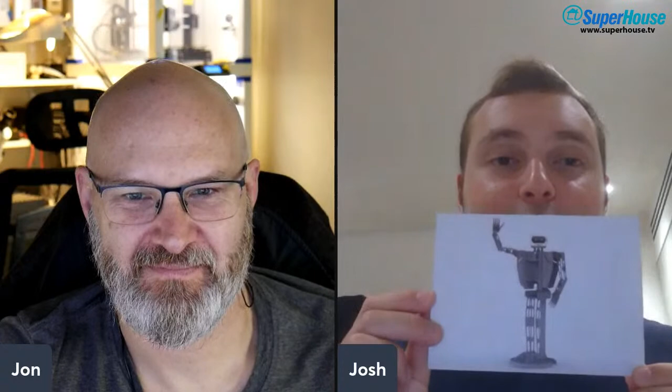So everybody had, I've got it here, this was the postcard with the robot on it. So that's a render with some information on the back. And this side is our design school's logo for the year, and all of that. I'm not good with this mirrored thing. All of the information there. So it was a bit like an art exhibition, and you're going to see that.

Now, to give a bit more context and background on the robotics, I've got 2 former robots here with me to show first. I'm only going to go through them quickly. So this is not your first project. This is not your first robot. It's okay. I've got a USB camera on a tripod here. It's not the highest quality, so I apologise in advance. And I'm not going to spend too long on these 2. But we'll start with the first one I did.

This one ran from September 2019 till March 2020, a month I'm sure we all remember very well. And it was completed just before Boris grounded everyone in the UK. And as soon as it was finished, I decided I want to make the second one. But we're going to start with the first one.

Now, it takes me a second just to switch the camera over. All right. Can everybody see that? I'm also going to try to figure out how to make you the larger one. Hang on. How do I minimize myself?

There we go. Okay. So you can probably see in the background as well, there is my reflow oven. Might look familiar to you, Jon. It does indeed. Yeah, the 962C. I won't tell you how I decided to choose that one. But anyway. So this is the first robot I did.

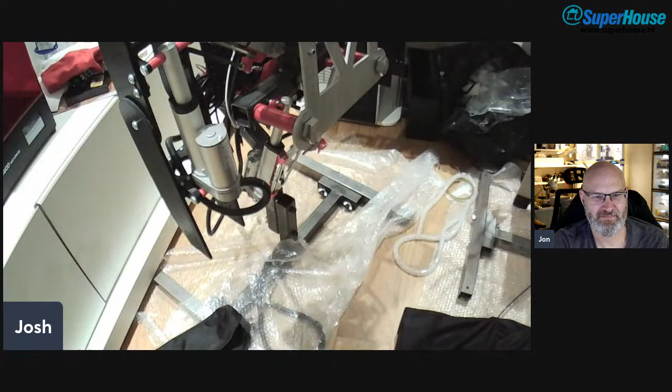It stands 4 feet tall. Let's see if we can tilt the camera down a bit. It's on sort of an H-frame mild steel base that's been welded. The majority of the joints are done with these stupidly overpowered linear actuators. I think each one's got 60 kilograms of force. I do remember somebody telling me once, I bet I could stop one of those from opening. I said, all right, you put your hand on either side and we'll try. Obviously, the actuator won.

Now, the head was actually the first thing I designed, funny enough, in bed on the computer one night. I just laid it out. And it was based on this, which is a clock I designed. So it's got 2 boards in there. We'll save going over that for a minute when I go back over to the table. But it's got an RGB matrix for its display. And you'll notice a resemblance.

Yes, I do. It's got the exact same matrix for the eyes. And that's NeoPixels, WS2812s or 13s.

Oh, Josh is muted. I'm not sure why. Josh, I don't know if you can hear me, but you are currently muted. Is that back? That's back, yes. So I picked up my microphone, and as I did that, I unplugged it.

Yeah. So you're talking about NeoPixels. Yeah, so it's an array of NeoPixels. I think it's 11 by 5 NeoPixels, which was designed originally to make a 7-segment type display. But that also makes very good eyes. But because you'd get bleed with the light between them, I 3D printed effectively a square grid, which sits on top, which is what, if I can just move my camera over to there, all these different parts are actually the build up of that. Yeah, so it's a sandwich of all those different layers together.

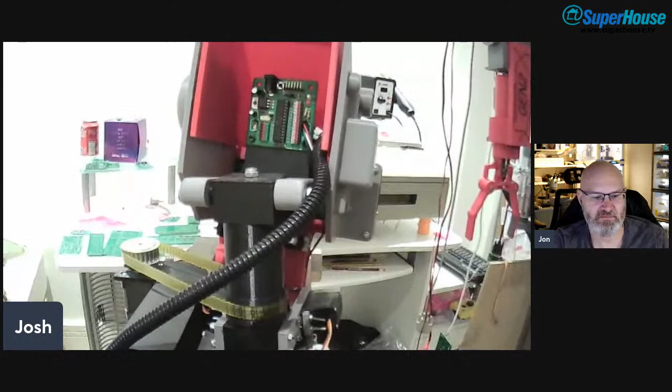Yes, exactly. And then in the back there is a DenScript Uno DIY. So those who saw the last stream will remember the DenScripts, which are my layout of boards. Now that is a DIY one, which is effectively meant to be a kit. It's basically an Arduino Uno, but it's got no surface mount components. In all honesty, I designed that because I was at university and didn't have access to a reflow oven and wanted to put it together. So that's how that was born.

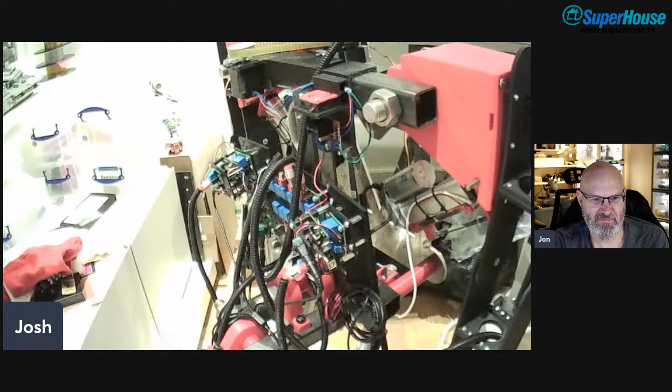And then getting around the back is going to be a bit tricky here, so you're going to have to bear with me a minute. I apologize if anyone gets motion sick. The video has frozen at the moment. That's back. Yep. Actually, I can just flip it around. I've got it on some bubble wrap on the floor so it doesn't scratch it. But the back is an absolute mess of cables. This is very impressive. That's a lot of work you put into this. Thank you.

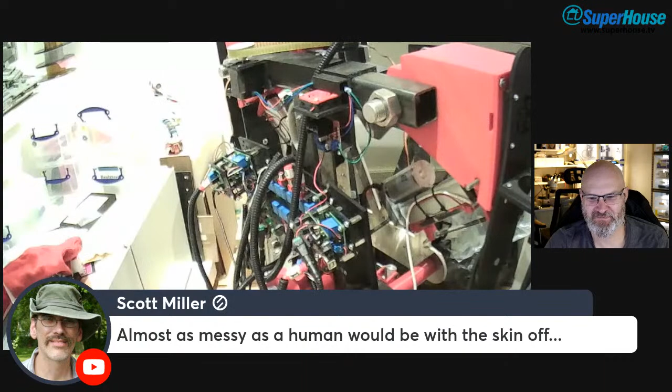I'll say right up now, I'm not a coder. I think there's a saying I heard once, which is I can copy and paste well enough to make it work. And that is quite literally how I was with this. So just as an example, these actuators which allow the arms to lift up and down, they've got attached to them linear slide pots, and that was how I got my position feedback. Right. So you've turned it into a closed loop system. That's really cool. So effectively it was a servo is what I built here. Yeah. Now, at the time, my programming was even worse than it is now, and I wouldn't count it that great now, to be honest with you. You're not far off, Scott.

Now, because I couldn't work out 100% how to get parallel tasking working on the Arduino, what I decided to do was instead I made these two stacks, if you want to call them that. That's effectively an Arduino Uno with a board which I call the dual relay motor driver, which is a long way of saying two relays wired together to allow you to turn a motor in two directions. So it's like an H-bridge set up out of relays. Effectively, yes. I could have gone and just bought an H-bridge. Don't ask me why I didn't. And I decided to make that board instead.

Now, the bigger board in the middle is actually... I'm not going to try and turn it around any further, but you can just see it here. This is 16 relays hooked up in pairs, so you get 8 outputs, all controlled by an MCP23017. Okay. So it's effectively an I2C relay driver, but with relays in pairs, so you can turn motors in each direction. That does the actuators that let the elbows go up and down, and also does the actuators that are in the waist there. And I'm just going to turn it back around. I promise the camera work gets better.

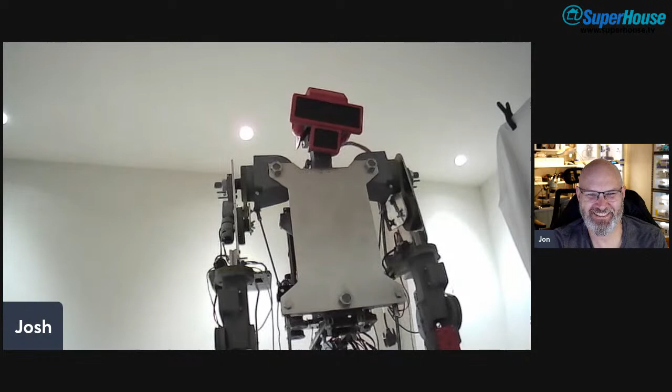So yeah, what I'm going to do is switch over now. This one did play true to the idea of the giant robot, because this is what we were just looking at. Yeah. And this is Gen 2. Okay. It has grown a little. So there's a height comparison. Just going to bring the camera up. So what does this robot do that's different? Firstly, I switched to actually using motors as opposed to actuators.

The head, underneath the hood, if you like, is exactly the same. So it's still got the LED grid, the exact same one, except I opted for using black PCBs this time, to make it a little bit harder to see. Thanks, Mitchell. It's also controlled over DMX. Oh, right, the lighting control system. Exactly. It's a lighting control protocol.

So the chest is actually hollow. There's a neopixel strip in there, and it provides illumination, so it almost looks like a heartbeat. Oh, can you see through that? I can't really tell. Is that a piece of aluminium? Yeah, so you've got 2 aluminium plates here and a gap with an LED strip here. I hope you can see what I'm doing.

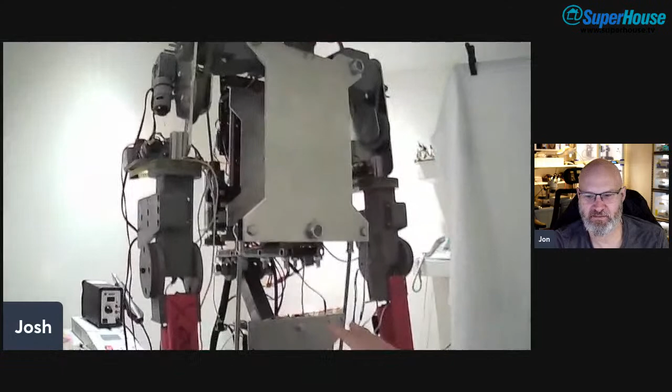So you've got ball screws here, which allow the arms to lift up. These ball screws here, effectively you've got the universal joints in the middle, and by lifting one and lowering the other, it makes the robot tilt in one direction or the other. If they both go up, it leans back. If they both go down, it leans forward. It's a little bit more back heavy than I would have liked, I'm not going to lie to you. So when it leans back, I get a bit worried it's going to fall over. The balance is a little off.

Yes, exactly. Most of the electronics are on the back, and to be honest with you, it's been gutted recently, and that's because I'm upgrading it with the control system in the next gen, which we're going to see in a moment. Okay. What else to say? The power is all on that MDF board at the back. Well, actually, before I go on to that, I also.

Yes, that's correct. So the software I'm using, I think by default it allows you to use 4 universes. I don't know if you can add more. I'll be honest, I've never had to go beyond 1, but it does give you that flexibility.

I also made some other possible heads to go with it. So this is one. At first glance, I thought it was something like a floodlight, but no, it's all RGB LEDs. Bigger mouth, and then. It's also very Bender-like. Yeah, 100%.

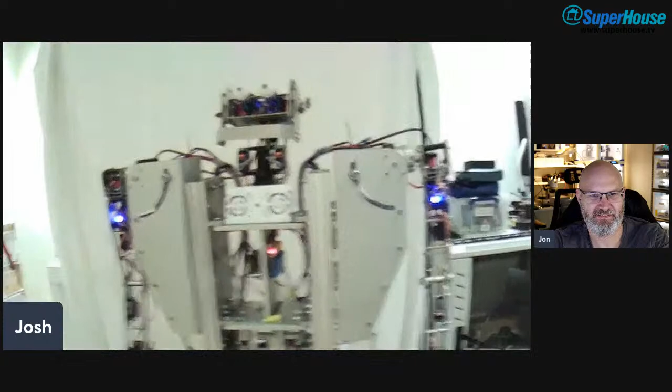Yeah. Okay. Should we do the big reveal? Yeah. It's very interesting to see your use of DMX. All right. So you want me to just bring this up on the stream? Yeah, let's click on add to stream. I'm going to show it first, and then we'll switch to the thing I've got. Okay. In that case, I will bring you up as the main screen. I am already. Yes. There he is. The camera's gone a bit wonky. I do apologise. It is one of those cheap USB cameras. That's all right. If I lower one leg, I might be able to get it. There we go.

So you'll notice the 3D printed eyeballs. And I've actually got some spare eyeballs, so we can look at them on the table and see how they're made. But the 3D printing was lacking a lot more in this one, and we really went to town with the aluminium. I'm going to move around a bit so you can see it, and there's some stuff on the screen we'll look at in a moment. Working from the bottom up, the base, and you'll see there's a support pole running up the back, they're mild steel that have been powder coated black.

The base is wide enough to support it, and to be honest, when designing for a deadline, you play it safe, and I didn't really know where the center of gravity was going to be, so I put the support pole in, and I'm really happy I did. That just acts as a third leg effectively. The legs and the feet are all made of aluminium that's been slotted together. These are all flat sheets that have been slotted.

Let's bring the camera down a bit so you can see. Actually, I've just discovered the quick release feature on this tripod. Right, so I'll try and be as steady as possible. But you can see that's a good view.

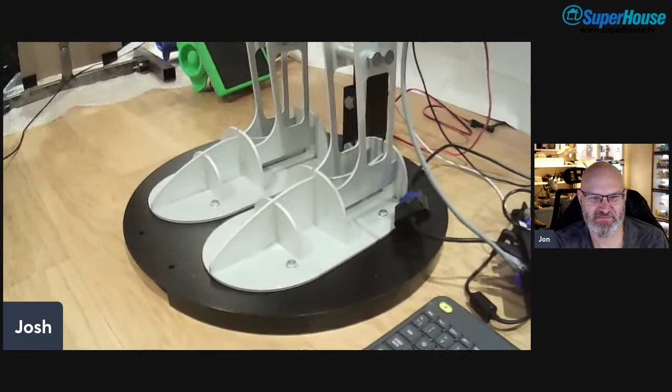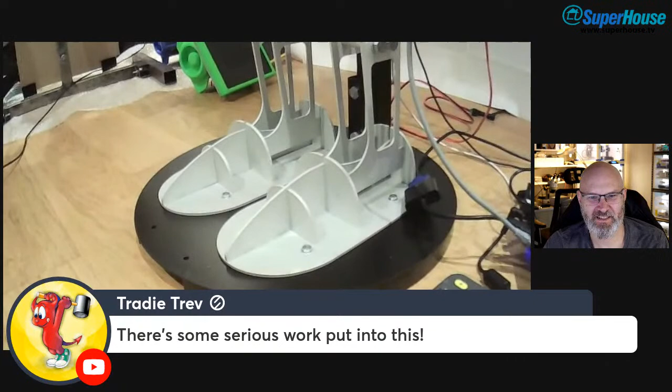A lot of the aluminium has been anodized. When I first slotted it all together, it was not anodized at the time, it looked so nice. I decided to weld it from the underneath. Yes, you wouldn't want the welds to show. I wanted to have seam lines and stuff like that. And I'm really happy with how that came out. I even went to the effort of turning the ends of the bolts so that you didn't see any details on them. Oh, wow. And there are many bolts to do that to as well. Yeah, these are M10, and I think there were something like 40 of them.

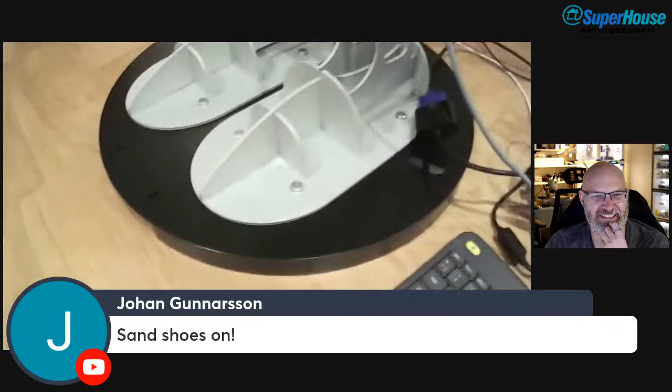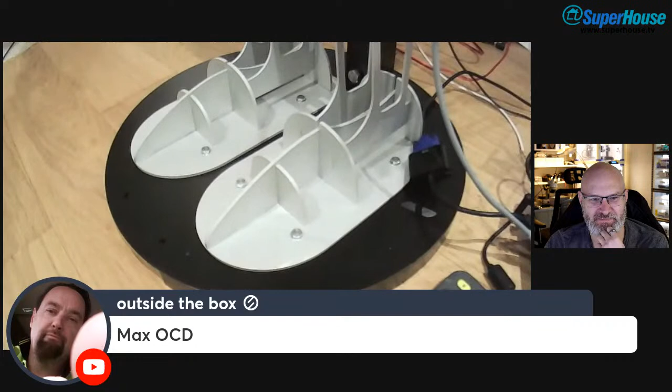About the feet, what I actually did one day, I put a ruler on the floor and measured my foot, and I got the length about right. The width I got way off. But a lot of this was based on my own proportions because that was all I had to work on. It is shorter than me, but the arms are about the length of my arms, and the hands are about the size of my hands.

You can say that again, Scott.

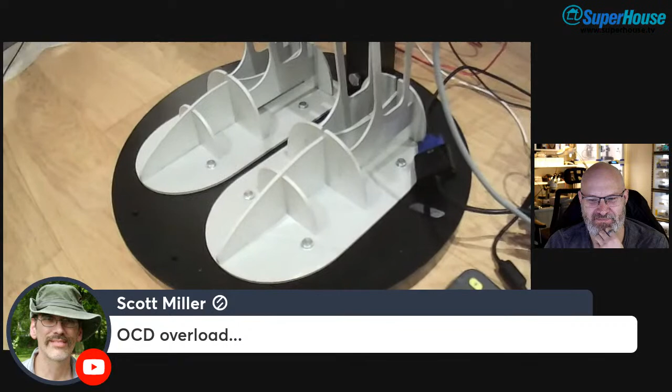If we sort of work our way up, the waist section. Now you'll notice there's some discoloring in there. What that was actually caused from was something I wasn't aware of. If you try and anodize with two different grades of aluminium, which is what I was doing, you get discoloring. So what I really should have done is when these sections were water jet, is then water jet a thin bit off the same sheet and use that to weld, so it'd be the same aluminium that came from the same sheet. Because I didn't, I got this discoloring.

I might try and see if I can just color it some way to hide it, but again, it's a prototype. I kind of know for next time. It doesn't look bad. No, to be fair, when I first saw it out the packet, I would admit I said some four-letter words, and I was a bit worried about how that was going to affect it. But actually, now that I've had it like this for a few weeks, I'm quite happy with it. I'm not sort of complaining.

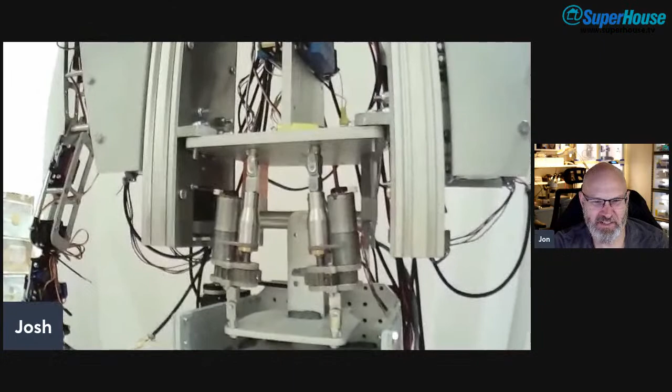Yeah. The chest, there's sort of a universal joint I made down there in the middle at the back, and then you've got these two actuators on the front. And I've got some pictures we'll show afterwards of the actual testing of those actuators. That's really interesting. So that makes it like a tripod structure where two legs of the tripod can change length, and therefore you can move the top around. So you'll see at the back there's sort of a shiny pole, if you like. Again, I'll show pictures of that, but that's a turned and milled piece that allows it to bend.

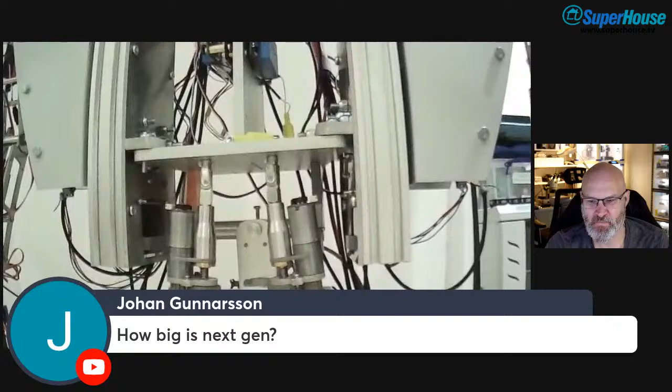So Johan, next gen is 140 centimeters tall, give or take a bit. So yeah, work our way up. The main circuits are based in the chest, but I've taken some of them out, partially because the coding isn't finished, and also so I can actually show them to you, because at the moment I've only got the number that I need. I don't have spares. So if I had spares, it'd be great to have them in and show you, but you'll see. There's a few bits you'll notice that are still the orange prototype color that need replacing.

Making our way up. I call this bit the collarbone. You've got 2 speakers and a camera. Oh, right. Okay. So it's a camera in the chest area. Yeah, so I'm trying to keep as steady as possible. I might now look at this height, switch back to the tripod because that'll be steadier than my hand.

So Scott asked, does his waist flex enough for it to sit in your car? Which just conjured up a vision for me, if you're going through a drive-through or something with a robot sitting beside you. Yeah. But there have been a few times I've considered just sitting it in the seat without the legs. Annoyingly, the shoulders are so wide, if I try and stand in front, you might get a sense of how wide the shoulders are. Yes, it is very big. Yeah, it's a bit too wide to sit in the passenger seat of my car, annoyingly.

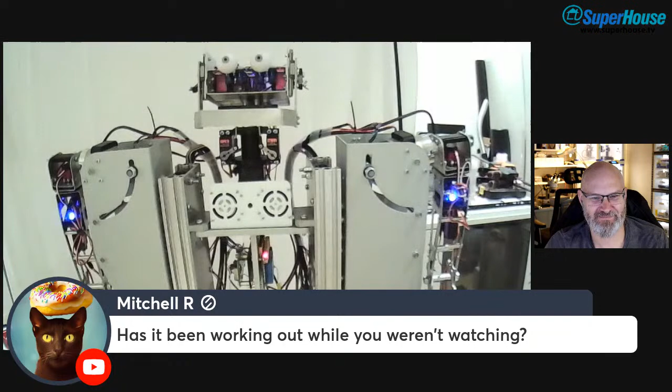Yeah, I've got that comment a lot, or something like that. Then in the head, there's 10 servos. So there's 2 that move the jaw. There are 2 for each eye, and they're not installed at the moment, but it's actually also got eyelids, and there are 2 for each eye set of eyelid, 1 for each eyelid, top and bottom.

So it works out. In total, there's 40 motors in the whole unit. That's a lot of servos just for the head. Yeah, so the head and neck, there's 13 servos in total.

Making our way just to look at the arms and the shoulders quickly. So beforehand, I mentioned that other shoulder prototype we showed a picture of. That was actually made of 3 pieces of aluminium that were sort of slotted together like so, and then welded. Now, one of them actually, rather than being slotted, it had bolt holes and was bolted in. And the reason for that was, once it was assembled, there was actually no way to get to the stuff inside. And I always thought there'll be that time when you have to do maintenance.

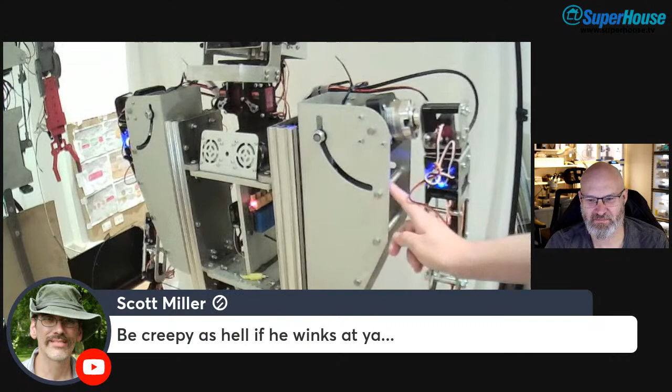In the end, I realised that you could actually design it in such a way that you wouldn't need to remove the side. But I was still worried about the rigidity of it. Those fears were unfounded, thankfully. This is just a sheet of 2mm aluminium that has been bent twice into sort of a U shape, with turned and tapped aluminium rods down the sides, so that makes the square. And then again, more turned bolt heads holding that all in. Yeah, it's surprising how little material it takes to make a very strong, rigid structure once it's folded and cross-braced.

If you think about something like an aluminium can, for those of you who have done it, an aluminium can feels reasonably strong. You can crush it with your hand, obviously, but it's really surprising if you cut it open and discover how thin the aluminium is. It's like a sheet of paper. And once you cut the can open and it doesn't have that cylindrical structure, it suddenly becomes really very weak and floppy. So once you take material and bend it into a shape like this, it becomes much more rigid.

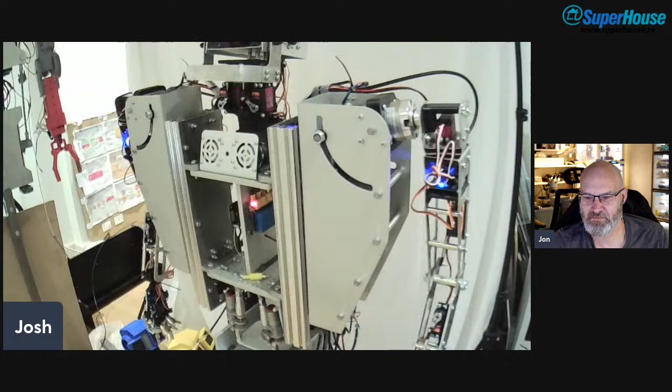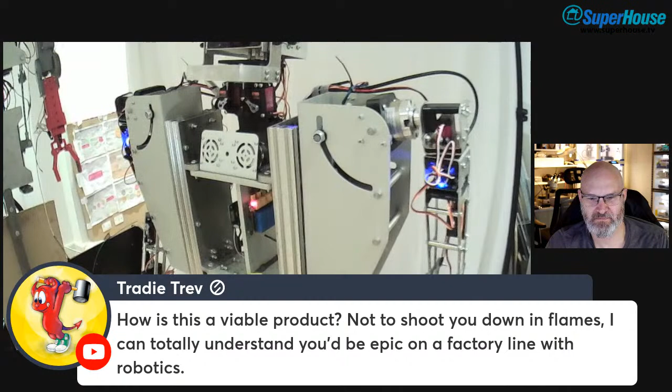One thing that I always think about, I'm sure you have seen them, Jon, you sometimes get support bars in 19-inch racks, which are more for putting zip ties on if you want to do a bit of cable management, and they're literally just a bar with a load of holes that goes across the length of the rack. But if you just did that, it'd be really flimsy. What they often do is they'll bend the sides, so they might only bend back maybe 5mm, but that bend stops it from just bending in half when you hold it.

So it is amazing that when you put a bend into something, you think about girders, like in buildings, how much stronger they are. Yes, 2 materials at right angles, and it becomes very rigid. Yeah. Now, on this shoulder, and I should just mention, each side is just a mirror image. So if I show you one, I've basically shown you the other as well.

The previous image I showed you, we had these big linear rails that the shoulder ran up. Now there's a few different types of linear rails you can choose from. The ones I chose are pretty strong, so that if you imagine it was held like this, it wouldn't just pull out, and I was worried about weight in this direction. In the end, they were way over the top, so I've used this stuff, which goes by a lot of different names. A lot of people call it Rexroth, because I think they were the first company that ever produced it. A lot of people nowadays call it 2020 aluminium extrusion, because this is 2 units wide, but a single unit is 20 by 20 millimeters.

This is 2040. It's V-slotted, so you can put V-nuts in and make structures. A lot of 3D printers are made out of it now, but you can also use V-wheels, which are runner wheels. So if you think about 3D printing heads, they move left to right, they'll use V-wheels to run in. Inside here, there's 2 V-wheels on each side, so you've got 8 in total across both shoulders. There's a ball screw that runs up the middle, and in the bottom, there is a stepper motor with a limit switch, and that's what does the motion up and down.

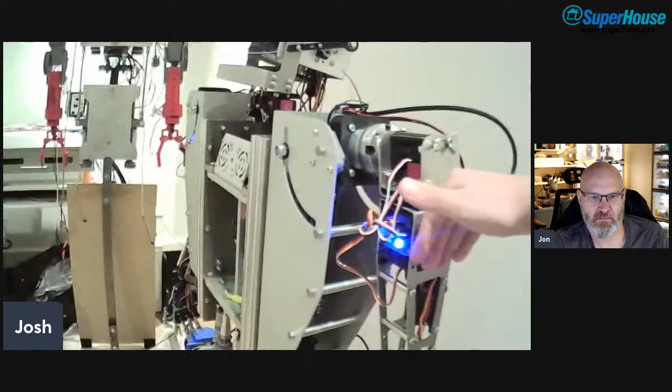To move the shoulder in and out, in fact, I'm going to go freestyle here again. If I can get it out. Come on, there we go. So on the inside here, we have another ball screw. As that moves up and down, it pushes at this point, which runs through the whole middle, and that lifts this motor up, which allows the arm to swing up this way. If that makes sense. Okay. Yeah. And then put this back in here.

There we go. For the arm, we've got a servo here, which gives us that motion. We've got a servo around the back, pushing on the back of the elbow. So as the servo pushes down, the elbow goes up. Mm-hmm. Similar motion for the wrist.

And then the other part of the wrist there. Oh. And the hands. The hands are incredibly intricate. That in itself would be a major project for someone.

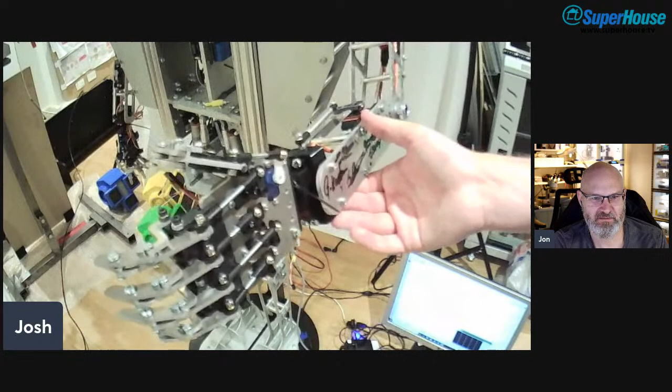Yeah, well, the funny thing about this was that each part of this project was a project in itself. So there were 5 hand prototypes, there were 3 arm prototypes, 4 shoulders, I think 8 heads. You know, only 1 body was made, but it was the 7th design. There was so much that went into all of this. And that was the funny thing. People said, you know, you're a nutter that you're doing this, Josh, but I went on and did it.

What we'll do is, if I stop showing that and I show myself again. Amy likes the hands. Yeah, well, the hands have been more trouble than I thought they were going to be. I'm not going to lie to you, because of friction between the aluminium. So I've been through 3 different types of servos so far to get them working. And I think I'm going to have to end up redesigning the fingers, making them a bit longer, so I can space out the bolts that go in all the joints and put washers in between.

Each finger has 6 aluminium parts, and obviously that's not including the bolts that hold it together. So on one hand, just for the fingers, you've got 30 parts, not including bolts. In total, in terms of water jet parts, there were 110 in next gen, and prior to that was 120 parts that had to be designed, unfolded in CAD, and made flat, and then those had to be folded, welded, folded again, tapped, whatever else. So there's a lot of work into it.

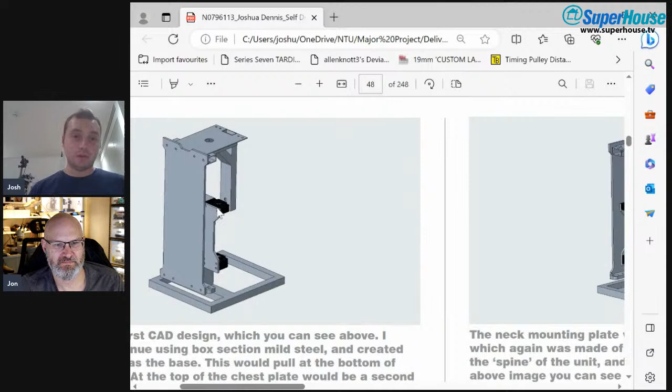Thank you very much. So this was the original thoughts I had for the body. So this body, which sets it apart from the last two I've done, it can rotate at the hips like that. And that was something I was really keen to get in. So my initial designs, which you can sort of see here, were using ball screws between those points, pulling down with rods to this front bit of the body. So the front body was effectively suspended from a hinge that would be somewhere here at the back. And then this whole thing would be a plate that would rotate.

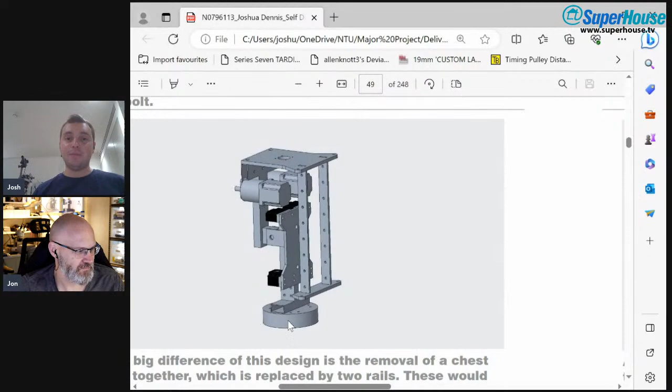And then I came up with, instead of trying to do it like that, using these captive balls. A lot of people probably have seen them before. It's glitching out a bit here. They're balls that are sort of captured within a housing, and they're used a lot on the bottom of those mobile computer consoles that you see sometimes in industrial settings, so they've got the computer tower they can move around. And I had the idea of having that sit in a slot. So you'd have a body like this with those in a slot, and it could then rotate. In the end, that idea was completely abandoned for the one you've just seen.

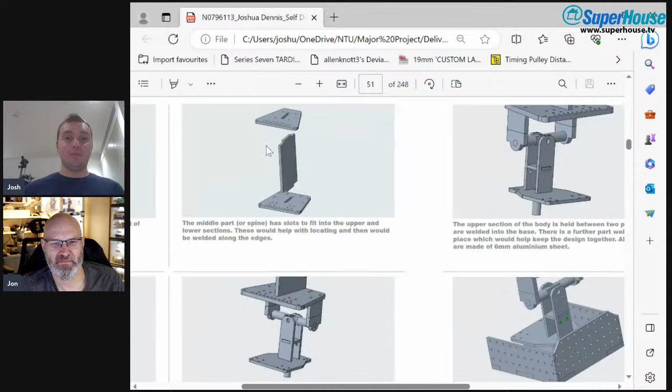It's taken a while to render. This document is over a gigabyte, I think. Wow, it takes a while to render. But the body you've just seen is effectively this. It's 3 water jet cut sheets, which are then welded together in place.

That is then attached via this central axle to another part, which is made of 4 water jet cut components, which are then welded into place. That's got a rod which sits inside the housing of the waist. Now, all those holes, just looking at, I worked at an assembly table, a couple hundred of those coming at the top. That's interesting, Scott. So basically, the whole table would be like a movable surface.

That's quite cool, that. The reason I've got all of these holes you'll see there, and it looks a bit like a sieve, is because at the time I hadn't designed the legs, but I was already sending this off to be cut, and then I was going to be assembling it. So I had to think ahead, and I thought, right, I don't know what legs I'm going to do, but I know that this is the size of the waist. I'm going to cover it in holes, and each one of those holes is tapped to M6.

Which was a lot of. I really got a strong arm doing that, tapping all those holes. Yeah. And then until I decided that using a drill was a better idea. Don't do that. You're not meant to do it, but I did it. But that meant that I wasn't also limited in my leg design. I also allowed points in case those actuators weren't strong enough. I could put springs in to give them an assist.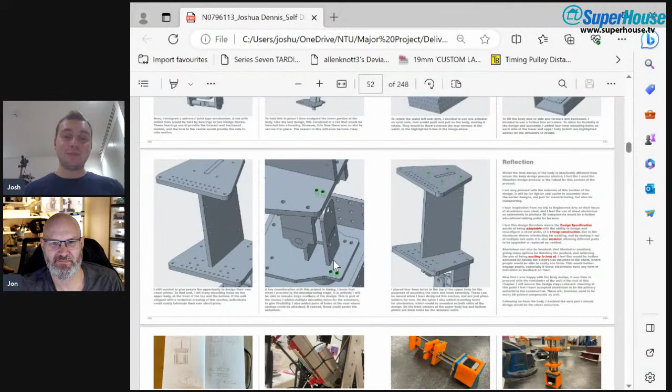And again, it was working on the whole, I've got to get this right first time, because I won't be able to remake this. I'm not on a massive budget, and I need to submit this at some point. Then I can see that you're talking about the size of the document. It looks like you're on page 52 of 248. So you've essentially written a book. Bear in mind that these pages are spreads, so 2 pages as well. Yeah. You can see down here in the middle, that's the seam of the book.

So yeah, it is a lot, and you can see a lot of it is imagery, thankfully, but there's a lot of text that goes along with it, and each image is probably 20 minutes of work. Obviously, you might say, "Oh, an image like that's not a lot of work." You're right, but an image like that, the extra minutes taken up in that one, if you get what I mean. Yes.

My initial idea for those actuators was actually looking at using stepper motors, and I found this really weird stepper motor where its axle is a lead screw. So you wouldn't need to have. Yeah, I've seen those. And I came up with some wacky design that was far too big. But in the end, I went to a similar design to what you've just seen. And this is what I was looking at. This was a 3D printed version before I made it out of metal, and I found these really cool ball joints, which were really cool until I discovered they couldn't take a lot of weight, and then I got rid of those, which I was really sad about because I really liked them.

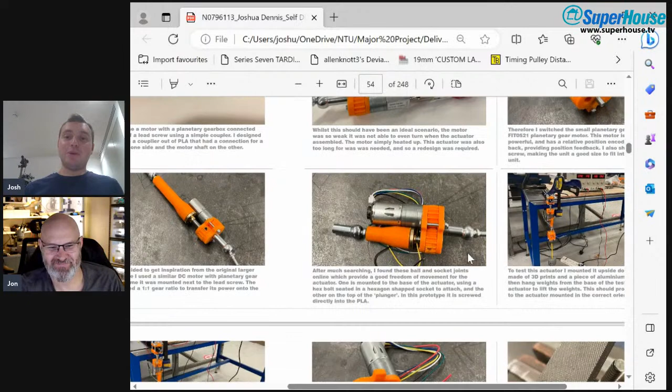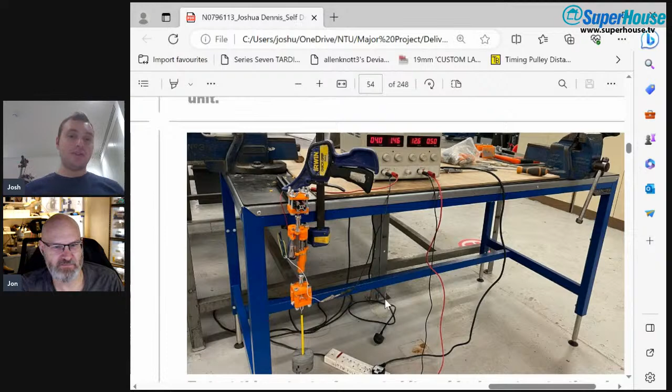The motors, you see, the motors are only about that big. So I was getting a lot of force out of them with a gear reduction that it already had in its own gearbox. And then I think it was about a 2-to-1 reduction I had with these stainless steel gears that were fabricated as well. So I was quite happy with that.

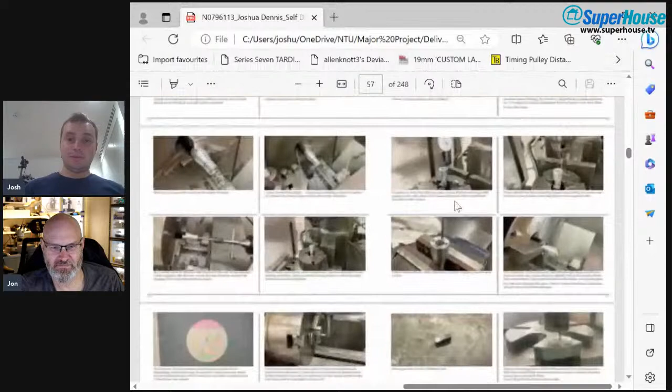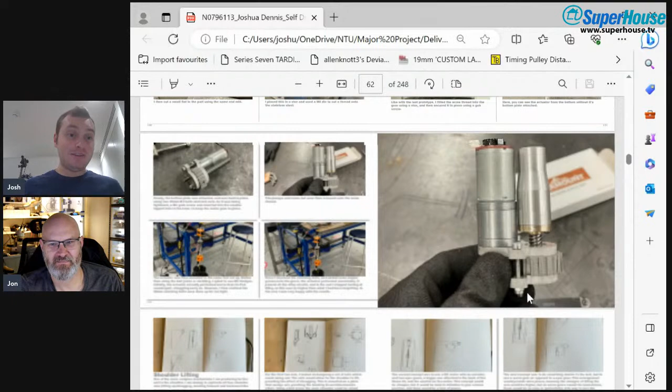And then again, it was all the turning of the actual plunger part. Again, I'm sorry that they're pixelated, but it's taken a while for the images to render. And that was the final one that ended up being used, without obviously the 2 joining points added onto it. So that on its own was about 2 weeks just on those chest actuators, which, bear in mind, are only that big, and the whole thing's 40 centimeters tall.

The shoulders we already spoke about briefly. These were the laser cut tests that were first. This is the one you saw a picture of earlier, just in a different angle. So I'm using that extrusion I mentioned before to make a

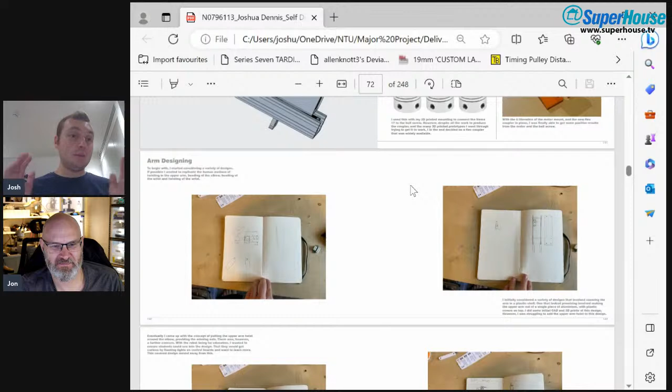So we've spoken a bit about the shoulders already, so I'm not going to cover that again. Make my way down. It's actually funny. It's not funny. Don't do this if you haven't done a degree yet and you're planning to. But I did do an all-nighter on the last night, as a lot of people do. And a lot of things I had to do was fill in gaps of images. And if you look at these pictures that were added, you see it getting darker and then getting lighter again as the night goes on and it comes into morning. That is true representation of the all-nighter.

And you can also just see here, this is a sheet of 6mm aluminium on the water jet cutter, where it's got some bits cut out. And the reason I've got that picture is you might notice some of those shapes look a bit similar. That sheet cut parts for all 3 robots over its life. So that is the chest plate of the first, that is the chest plate of the second, and that's parts of the waist of Next Gen. So it sort of covered its whole life.

So David just asked, is this document available? I'm afraid it's not. So this was the document that was actually submitted as part of my degree. I'm not actually sure if I'm allowed to submit it publicly. Not because anything on there is top secret, but because of the sections I'm not showing. Interviews were conducted with people from industry and education, and while they consented to it being used in this document, they didn't consent to being published into the big wide world. What I might do is see if I can publish an edited one where I would either remove those pages or for fun just black them out and make it look all CIA type.

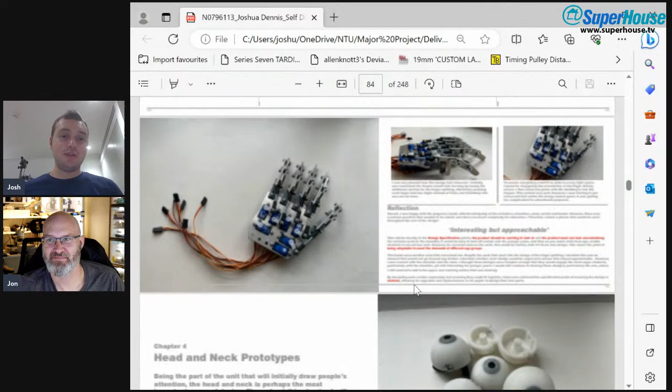We were talking about the hands before. I did actually look at trying to see if I could do a finger splitting on the hands, and I managed to do it, but it just overcomplicated the design. But that was the first assembled hand prototype there. Yeah, I think that is such a project all on its own.

What I will do now is, because this is also an electronics YouTube channel, should we actually talk about some electronics? Yes, please. Let's do that. So what I'll do is I'm just going to move my camera background. Do you want to just stop sharing that view, Jon, please? Sure. I've got a table set up here at the side.

There we go. So I should just mention now what Next Gen actually runs on. It runs on a Jetson Xavier NX, which is, for those who don't know, effectively a Raspberry Pi on steroids. It's got massive amounts of GPU, and it's great for machine learning and machine vision. When you've got the Jetson, you can import something called Jetson Inference, which is their framework. And the program it's running, which I'm going to be demoing in a moment, is skeletal tracking. In the old days, you'd have to put markers on you, and you'd have cameras that would track that. This does that without any markers, and you can use any web camera to do that. Nice.

But that just runs all the brain, and then everything else is connected to a central controller from that. And you're going to see that now. Settings, camera. Right, let's just adjust where we are.

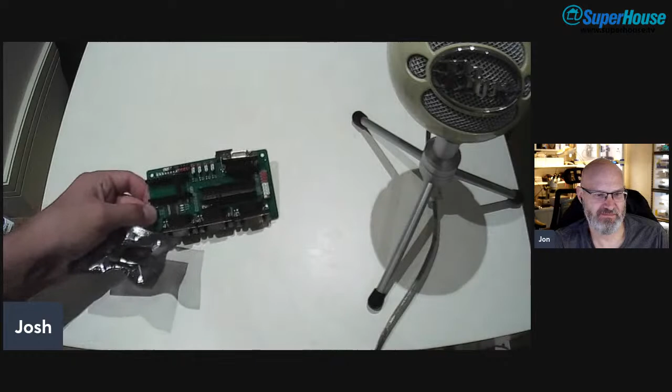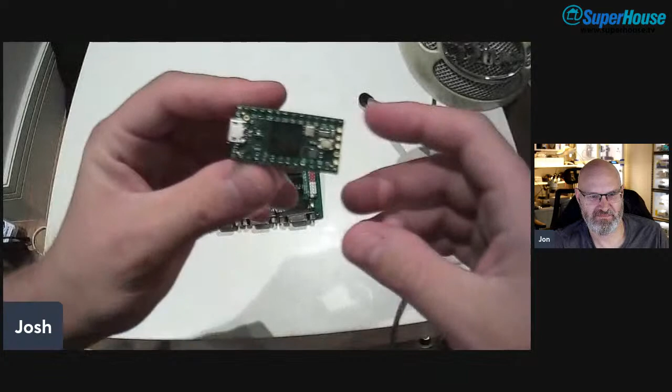So the controller that's inside of Next Gen is one of these boards here. And then it also has sitting in it one of these as the main hub, if you like. So this is a Teensy 4.0. It's a 32-bit Arduino compatible controller. It's basically every developer's dream because every digital pin has interrupts. Most of them also have PWM.

It's got CAN bus built into it. It's got 8 UART serial interfaces. So it's a great board. That would sit in this point here. And then I decided in the end to control everything over I2C.

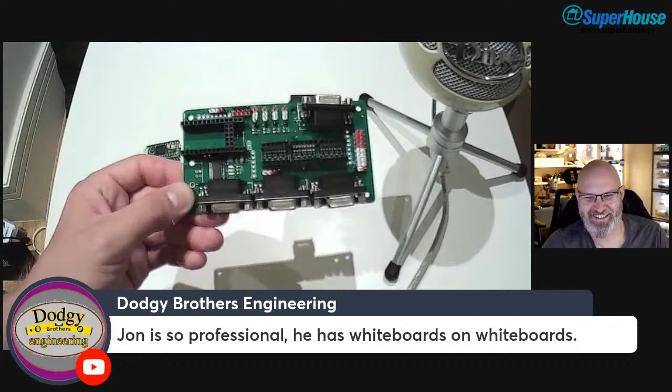So, I know that was... This is a random comment just thrown in. I think that's a reference to a video I did a long time ago where I was using a whiteboard to explain something, and I drew a whiteboard on the whiteboard. Yeah.

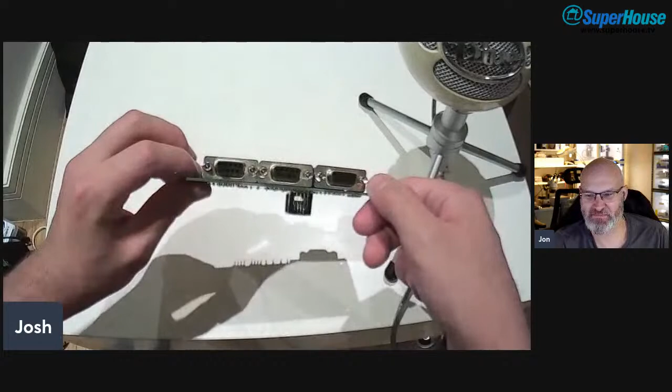So I decided to control everything over I2C. And what I did was I thought to make it easy, I'll use these 9-pin D-sub connectors to connect everything together. Each one is actually exactly the same. It's just doing I2C, but obviously the I2C address is set at the end device, not on this board.

And it meant that during setup, I could plug anything into any socket, except I ended up putting these 3 too close together, and I put something in the middle I can't put in the other 2. So it only accepts 3, not 4, but I fixed that on the upgrade. Now, the Teensy is a 3.3 volt device, but I kept everything else at 5 volts. So I then put in level shifters.

I put in the footprints for the actual level shifters, but in the end, because it's cheaper than the components, I bought the level shifter modules that are just easily available, and I just stacked them in there. It's got 6 pairs of level shifters because you've got 2 for I2C. You've then got 4 serial ports here. And then also you'll notice an FTDI connector here with, I know it's not populated, but USB socket.

That was for that. All the data that this is sending back to the Jetson, it would also send out of this USB port, and I could plug in with my laptop and get that information without having to connect a screen and a keyboard to the Jetson. Nice. So it effectively gave you a second debugging channel without interrupting the connection to the Jetson. Completely, yes. And also, once I've set up, sometimes you put the screen and keyboard away because it's not needed, and that can start being a distraction for people if you've got to then get out in the middle and plug it in, and exactly.

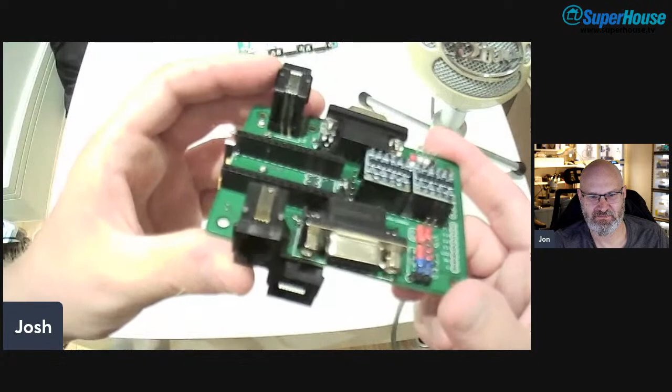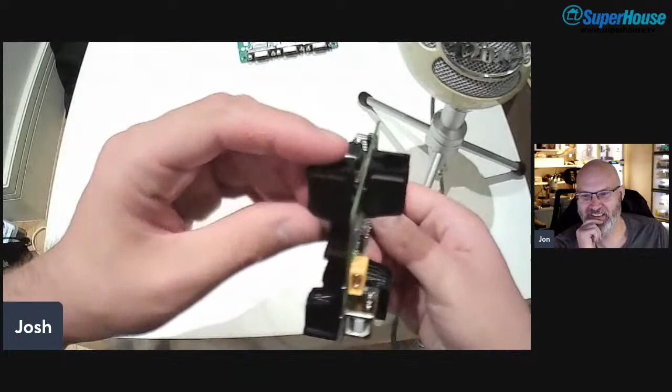However, those who've ever used RJ sockets before will know that you've got 2 rows of holes for the pins to go through, and they're offset by the distance of half a hole. I might have got the offset the wrong way around on the 2 rows. So I've never done that. Never. You can't claim that I've ever done that. Yeah, well, I have. So I had to cut off the supporting pins, break the pins out the back, and it works. A revision has been done.

This one's got 2 I2C sockets, another serial port here, 3.3 volt I2C, 5 volt I2C, all the power connectors and stuff to interrupt it. And then on the back, look at it this way around, a power in for 5 volts. And I'm going to explain why I know that's 5 volts in a minute. Oh, and you've used an XT series connector. Yeah. You get the double thumbs up seal of approval from me. It's an XT30. I'll let you guess where I got the footprint.

The USB debug, and then you'll notice there's 2 RJ45 sockets. One of them breaks out with my light switch footprint on the ones I sent Jon. So it goes ground, plus 5 volts or 12 volts, in this case it's 5 volts, and then 4 switches. Reason is, I thought it'd be great if you needed to set the robot off to do things based on triggers. You could just plug in, and if you just grounded a cable, it might react to something. So it was an easy way of building an interface.

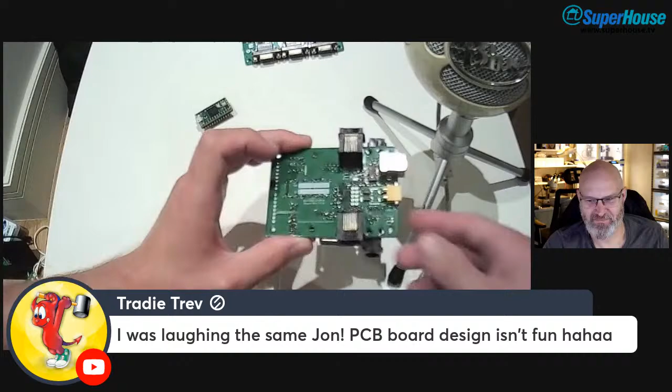The other one goes off to an indicator board, which just happens to have 8 connectors. So I thought I'll just use RJ45 because it's easy to swap in and out when there's a mistake. Also, on almost all of the boards, I put these 2 white boxes with serial number and ID. I'm hoping to manufacture next gens, and for keeping track of circuits that might break, give each one a serial number, and that way you can keep track of it.

Well, that little comment has just opened up an enormous rabbit hole. There was a comment maybe half an hour ago, which I didn't bring up, which is, how is this a commercial project, a viable product? And there was a little bit of chat about how this is a university project. It is showcasing skills. It doesn't necessarily have to be a product. But now this sounds like you do want to be making it. Did you want to talk about that now, or later? I'm going to talk about that at the end of the stream, if that's all right. That sounds good. And that means everyone's got to stick around to the end to hear it now.

I will also just show you, I have made a longer version. I haven't actually finished placing all the parts on this. This one's got extra I2C sockets. It's got the USB debug. And rather than having all the serial ports broken out, I left them all together so I could put another board on top if I wanted to.

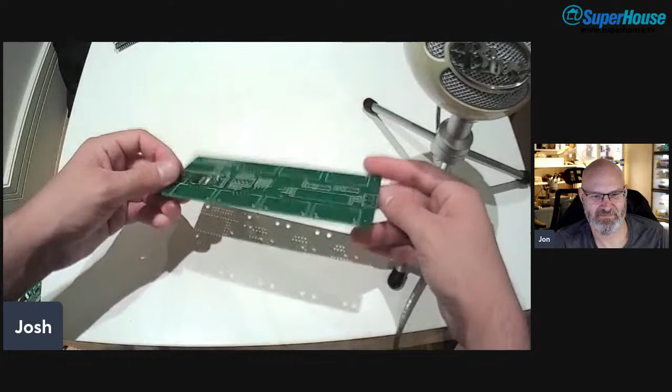And it's also got space here for the DMX module, rather than having that on a separate board that plugs in. So it's kind of an all-in-one contained board. Originally, I was going to put this on the back of Next Gen as an upgrade, but decided not to now. But I do want to start selling these circuits so that other people who are making robots can use them.

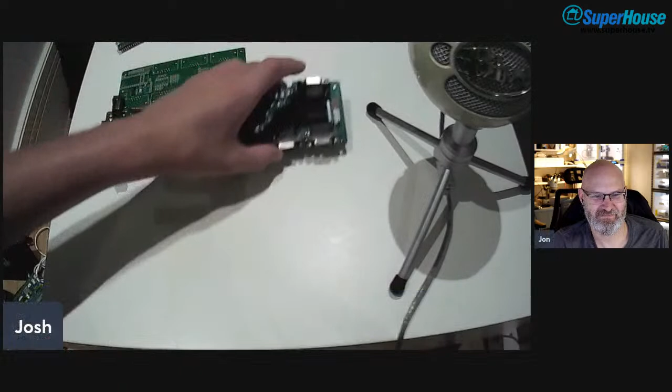Anyone who's ever been on Star Tours, the old Star Tours pilot, which is now the DJ at Star Wars Galaxy's Edge in Disney. There's a droid builders group on Facebook, and I posted and said, I make these circuits. Would people like it if I sold a group of boards pre-programmed so they could build their droid, put them in straight away, and just have to buy the servos and stuff to plug in? And there was some talk about that, so that might be something I'll be looking at doing in the future.

So that's like the control boards, if you like. Yeah, I think there's going to be some chat that'll continue. Yeah, so they would be useful. You're absolutely right. What you are building here are building blocks for your project, but they can be generalized to other robotics projects as well. And I think that is a very good analogy with home automation as well. I remember you saying in a video once, Jon, that you started making this stuff because you wanted it, and then you put it on the internet and other people wanted it too. And that's kind of the mindset I'm running with here.

Now, I mentioned that was all I2C, so I had to control a load of servos. So I used, and I will admit I'm reading it off the chip right now, the PCA9685, which is an I2C PWM driver. Yep, for LEDs, but it can be used for other things, and it's also used for servos. The Adafruit board is probably one of the most cloned boards in the world after the Arduino Uno. I basically took their schematic, modified it a bit, and worked it into this board. What's great about it is it's addressable. So you can have 62 of these boards hooked up.

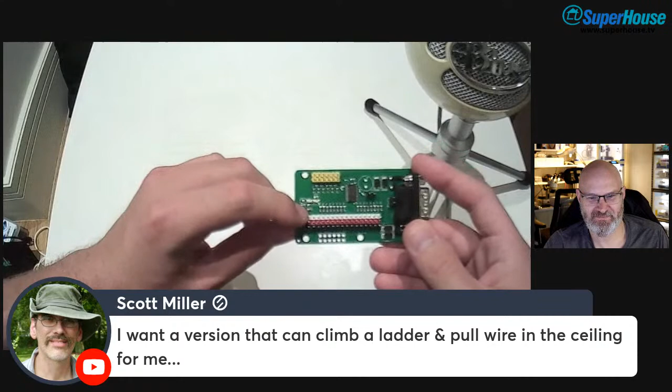What I also did is I added an extra LED which is connected to output 15. It goes 0 to 15, so you have 16. And on Next Gen, and you will be able to see it when we turn back around, there's a heartbeat LED. So every second, the pin 13 LED on the Teensy flashes, so I know the program's running uninterrupted. I have that same LED flashing on every board, so I know that every board is still receiving data and is still functioning. Yeah, you can see the communications is live between the different parts of the system.

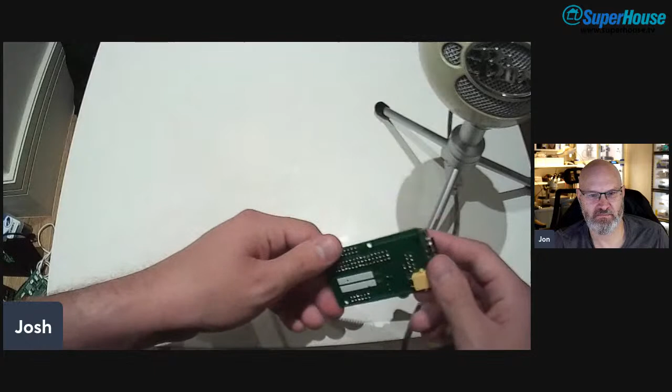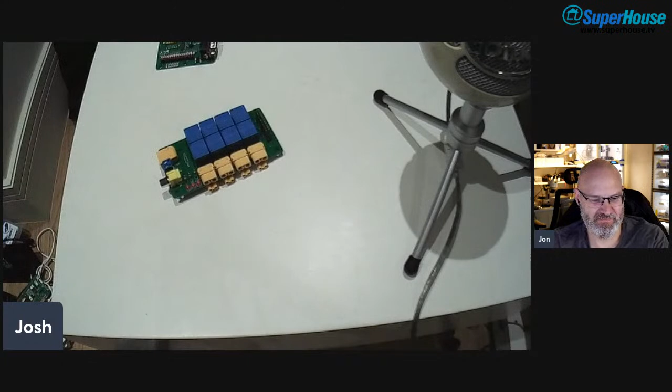This board is the main power board for Next Gen. There is the old version of this in the chest, which is now working like this. The old version had an MCP23017 in it, and I could individually turn off the relays. I never did that, and I had so many problems with communication with the MCP for some reason. In the end, I removed it and soldered all of the outputs together and then soldered them to the 5 volts connection, so they'd just always be on.

Okay. So it just becomes a distribution board. Exactly, unless power was pulled. Now, I'm connecting all my emergency stops over these yellow phono connectors. So that would be connecting the emergency stop. If I pull that out, all the relays disengage.

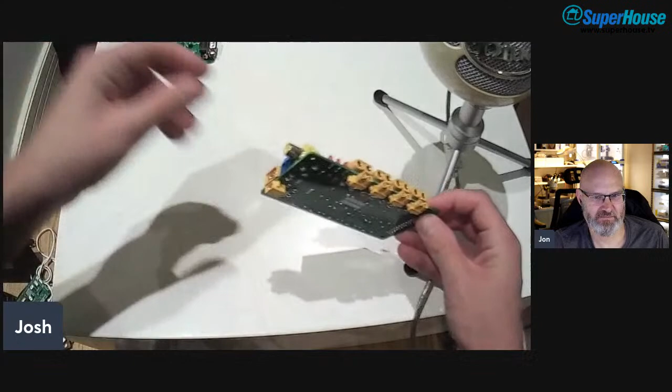I use XT60 for 12 volts and XT30 for 5 volts. That way I can never accidentally plug 12 volts into 5 volts and vice versa. Never blow something up by accident. And then here you'll see that there's four 5 volts on the bottom, four 12 volts on the top. All the relays that control that.

I have kept, even though they're all connected technically, a separate relay for each channel. That's because each relay's got a maximum of 10 amps and it just gives me that overhead. I know 10 amps is probably more than what the cable that's connected can deal with, but it just gives me that overhead. I've also got 3 LEDs, 12 volts and 5 volts indication, and if that is on, it means the emergency stop is off. If that is off, it means the emergency stop has been pressed.

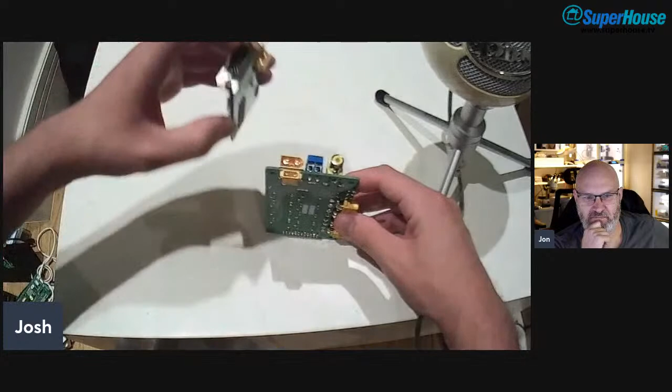Then there's also all these pins here. These are pin headers, but they're taller than normal pin headers. Oh, yes, I can see that. Extended headers to cover the relays. Exactly. And that allows me, if I ever needed extra power, to plug another board on top and distribute the power across. So it allows distribution, basically. So that is why I've been calling these 5 volt connectors. I know they're XT30s, but in the world of next gen, they're 5 volts. That's 12 volts. That's emergency stop.

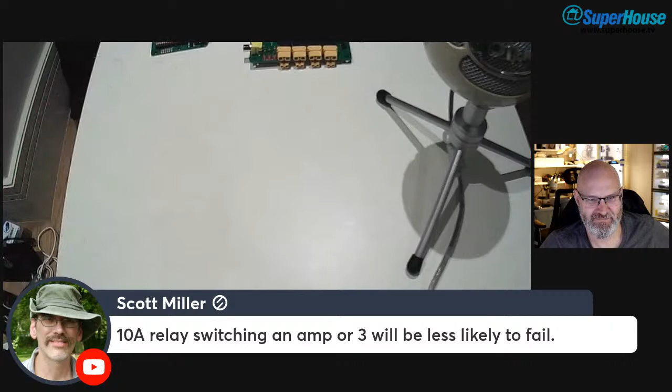So again, it's trying to make it simple, because going on to that commercial aspect, the last thing you want is someone calling saying, I've plugged in the wrong thing on my first day and blown it up. So again, I don't like saying idiot proof, but yeah. 10 amp ones will be less likely to fail. No, I agree. And in reality, they're very rarely pulling anywhere near 10 amps, but it gives me the overhead that if someone decided to plug 16 servos into one board, it's got that overhead. And I've made sure that all the traces that carry power are very high.

I've actually protected everything with diodes on the boards. So you'll see that you've got 2 sets of 2 diodes. One is for the 5 volts in to deal with the servos. The other one is for the 5 volts in through the connector that's controlling the IC on there. So I'm just giving myself that reverse voltage protection.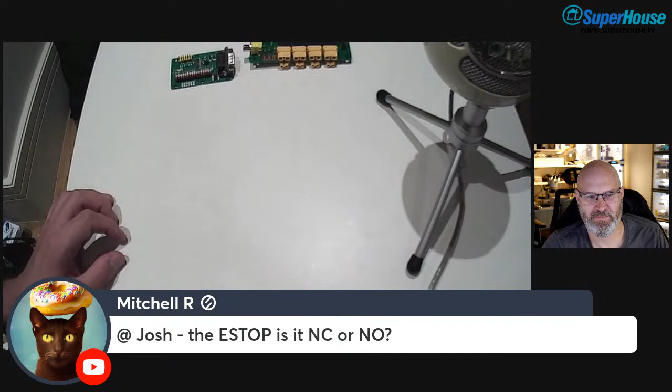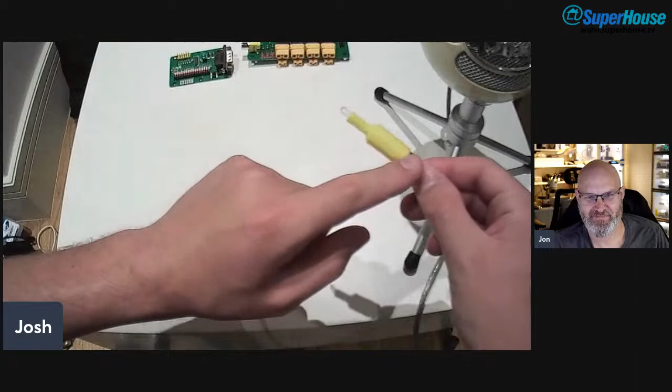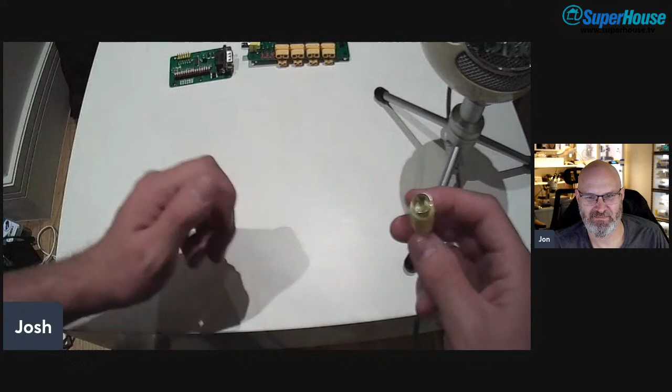So Mitchell wanted to know about e-stop. It's normally closed. And so when I'm not using an e-stop, I actually have this, which is a phono connector where I've wired the 2 pins together. And I've just split the wire up, because I always thought if I was ever working somewhere, I could put that on a key ring or something. But that is just when I'm working on it myself. If I don't have an e-stop connected, I can just plug that in, and it acts like an e-stop if I yank it out. Pull it out, power's off, effectively.

Moving on to the exciting board, I guess. For controlling the shoulders and the waist, I was trying to come up with some kind of a motor driver that needs to drive 4 motors. So in the shoulders, you've got 3 steppers and a servo, so that would be 4 in total. In the waist, originally it was going to be 4 actuators. In actual fact, you've now got those 2 actuators in the chest and a 60 kilogram servo on the side of the waist that does the waist rotation side to side.

Did you say 60 kilo servo? Let's go have a look at it. 6 with a 0. That's a very high power servo. Let's see if we can just bring this up. There it is. So it's quite a big servo. If we come around the side back here, you might see it a bit better. There are some cables hanging around, just try and move those. And it's hooked in directly.

Oh, I realise your view is a bit off. There we go. So it's just like a crank, like that. I see, yes. It's just displacing that rotation. So originally I was going to have 2 actuators here pointing in from each side at a diagonal, and one would push and one would pull, and then vice versa. But I just decided in the end to stick with a servo.

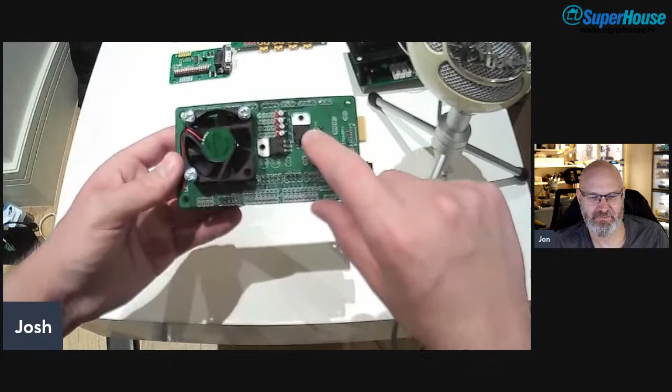So I did a redesign of what must be the best looking board I think I've ever done, which is this. So on the top here, you've got the steppers broken out here. The reason I haven't got pins in there yet is stepper wires come in 4 colors, and I just need to work out which way around the colors are before I put the pins in. These are the pins to be broken out to the temperature sensors. Now, these are 5-volt regulators to allow you to have 2 amps. They're both 1 amp regulators, but combined together they make 2 amps. So you can have servos plugged in down here. And then all of your encoders are passed through to here, and the switches are passed through to here. And I think these are 2mm JST connectors.

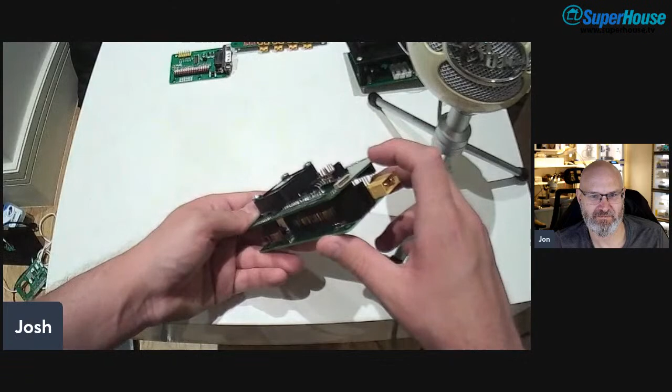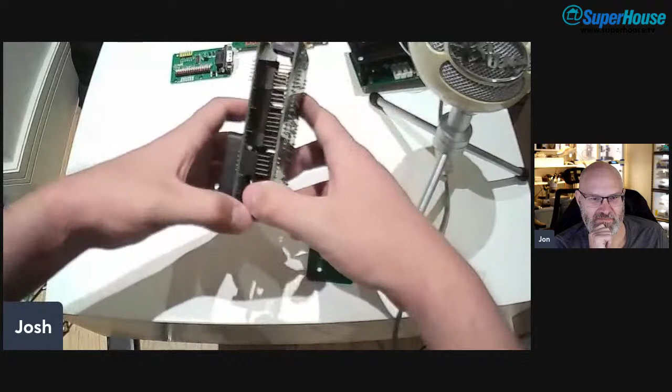And what I decided to do is, rather than having to wire each switch back, I'd have a switch circuit board like that, just to break it all out, and they'd all come back together. And there's a fan here which is controlled by a relay underneath, and all this does is bring up all the connections. If I can pull it apart, there we go. So all the connections on those double high pins, see one of the motor drivers installed down there, and you see all the temperature sensors that are underneath.

And then for when I want to use a DC motor as opposed to a stepper, I designed that, which is just a carrier for an H bridge, and it fits in there. It would take what would usually be the step and direction pins as 2 PWM pins. Okay. And it combines the 4 stepper pins into 2 motor positives and 2 motor negatives. And then that all fits together.

Nice. Thank you. Yeah, that double stack approach is interesting, bringing the signals up to the top board. So you've got mechanically accessible connectors on the top, and the heavy work being done on the bottom board. It's a good way to get the form factor into a reasonably small footprint just by sacrificing a bit of height.

Yeah, no, 100%. And then for the encoders, so this is the board that would be doing the waist. It's almost identical, so there's less things populated on top. The regulators, instead of being 5 volts, they're actually 8 volts. And that's because that 60 kilogram servo is an 8 volt device.

And then that would break out. So that board connects to the actuators in the chest. So there's a lot of boards that actually end up going into the robot. So yeah, that is it. But what I'll do is I'll just quickly show you where those are placed on the robot, and then we can do the demo, and then we can talk about that commercial thing.

So I might go freestyle again, so I apologize again for the wobbly hands. I'll just get this out from underneath. There we go. Which H bridge? That is the L293D. Okay. One of the classics. Yeah. So if you can't see what I'm talking about, please just say. I'm a bit far away from the computer now.

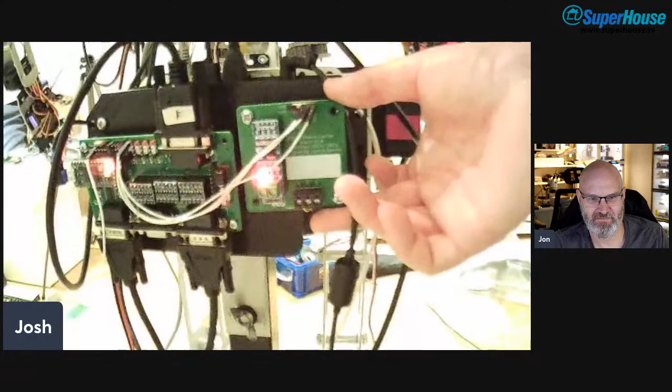But back here, there is the Jetson. You can see the activity LED on the Ethernet flashing away there. On the back here, we've got that control board I showed earlier on with all the level shifters in place. This is just a DMX adapter board. So that's connected to DMX. It's basically an RS485 module on a carrier board.

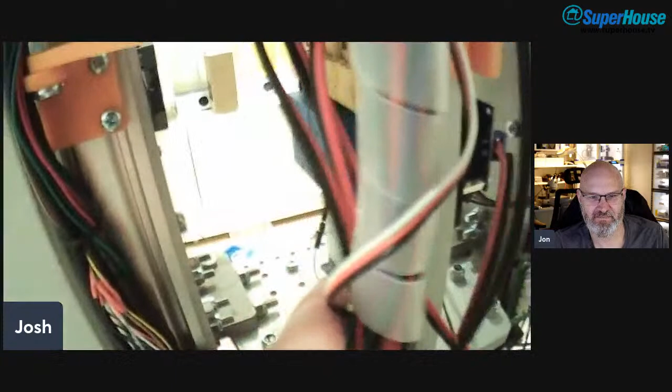If we just make our way up, that was just a quickly hacked together power board so that I could control that 8 volt servo, and that was just needed for demoing at the uni. Over here, you'll see the last edition of that power board that I showed earlier. Yes. Those are the switch distribution boards. There's one on each side, and you'll see all the wires for the arm are sort of cable managed up it, and then they all come together into one big mess. Umbilical. Plugged in. Yeah, exactly.

And then if I come back around here, in the top of each arm, you have those distribution, so the I2C motor drivers, and you'll see that activity LED I was talking about before flashing away. Yes. And that is also right up at the back of the head. Yes, I can see that. See there. So that's sort of where all the boards are. The only other circuits that are in here that I haven't shown are behind the camera, which is an ArduCam board, and an amplifier for the speakers. It's all just mounted back there.

And I've started playing around with an Intel RealSense camera, which is like a Kinect. Okay, is it a depth camera? It allows you to do depth camera sources. Great. Yeah, so I'm just going to switch back to the normal camera so you can all see me again. But yeah, so I've got it right here. The Intel RealSense camera there, so it's quite small, but it's got depth sensing in there as well. So it's very good. Yeah, the Kinect is much bigger than that.

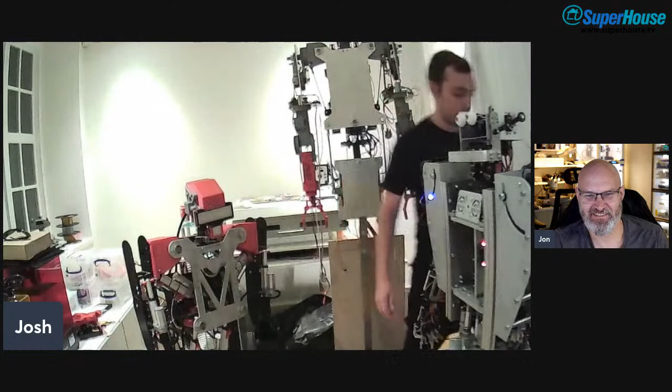But I will just switch the screen over so it's on the Jetson again. And you can see what it sees when it does the face tracking. Just give it a second. There we go. So I'm just trying to work out the best way of showing you this. It's quite dark. There you go. You can actually see it. So you see me. Oh, yes, I can see the skeleton overlay.

Yeah, so even if I put my arms up, there we go. It's got this arm more for some reason, but it will map. And if more of me was in, it will map all the way down to my ankles. And what it's following is the midpoint between the orange and the higher red there. Yeah. Okay. So I'll just switch back to the regular camera now. There we go.

So that is Next Gen. Very impressive. Thank you. Just describing it has taken a significant amount of time. So the amount of work that has gone into all of those subsystems, that's mind-boggling. Thank you.

I'll mention that commercialization thing before if there's any other questions. So Next Gen has been selected to go to the Engineering Design Show, which is, if you're in the UK and you're able to come, in Coventry on the 11th and 12th of October. There's thousands and thousands of products there. I think last year or the year before, DigiKey sponsored the cafeteria there. So it's a massive event. And Next Gen and myself were invited.

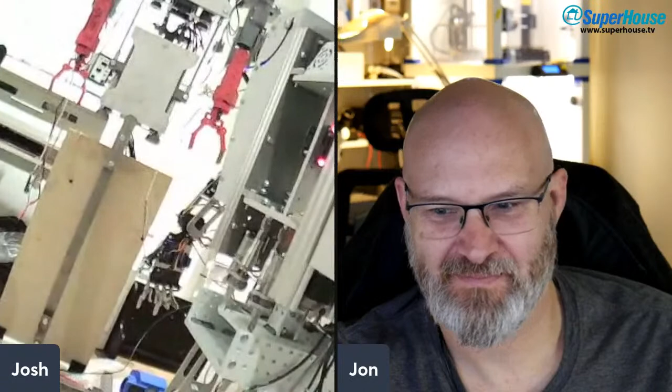I'm just going to switch back to the seasickness camera, as I'm going to call it, for a second, because I just want to show one. I've got a few thank yous, and you'll just see on that arm. I'm trying to do this without looking at it. There we go. On that forearm, there's a load of signatures. Those are all the people in the workshop who I mentioned earlier. I got them all to sign it as a thank you to them. Switch back to my front camera.

If anyone's looking at trying to do something like this and they're not sure where to start, look at what other people have done. You'll find, if not help, inspiration. And there's always someone who's willing to help, is what I found. There's been many a time over the last year I've had a question, I've just jumped on the Discord and gone, anyone know about this? And within half an hour, the solution, or at least a point in the right direction, has come up. Some clues at least. 100%.

Because I can't see the chat. Is anyone saying anything? Oh yeah, there were. I've only been half watching it myself. So, Dodgy, when is the first Tier 1 version going to be released? Give me a year. Yeah, there have been a couple of funny little things like this.